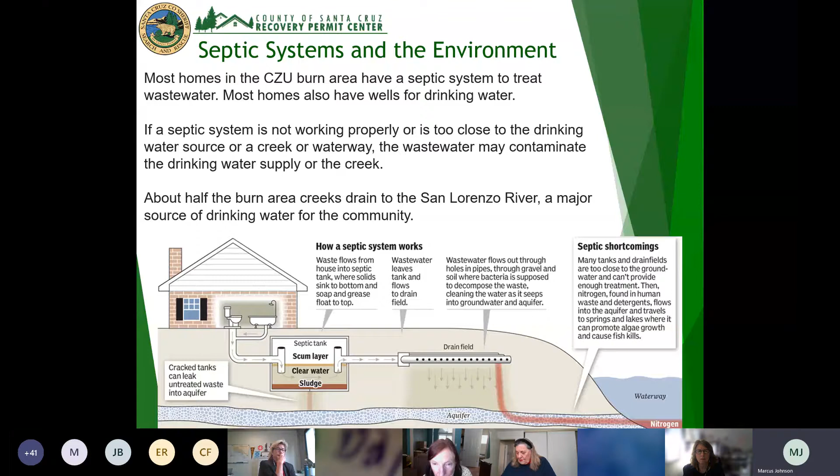So Paya talked a little bit at the beginning about where we're going to get into some of the code sections. I know this is a drier subject than most people want to hear, so I've summarized the main section and the main areas of the sewage disposal part of the code.

Really, what we're all living in is the same section regarding in-kind versus adding waste or load to a system, and what you've heard versus what you haven't heard. So basically in the septic world, you have a 500 square foot one-time addition of habitable space that doesn't include a bedroom increase. I know you've heard 10% and a bunch of other numbers all over the board, but as far as the septic world goes, it's 500 square feet of habitable square footage that we're looking at.

And this section, 7.38.080, existing systems—what we're trying to do is review the existing system as it was functional prior to the fire and line it up to what the proposed rebuilds are. So a lot of what we're looking for is to make sure that the system was functional, that it was in an adequate area, and that there was a legal structure. It was a legal, permitted system.

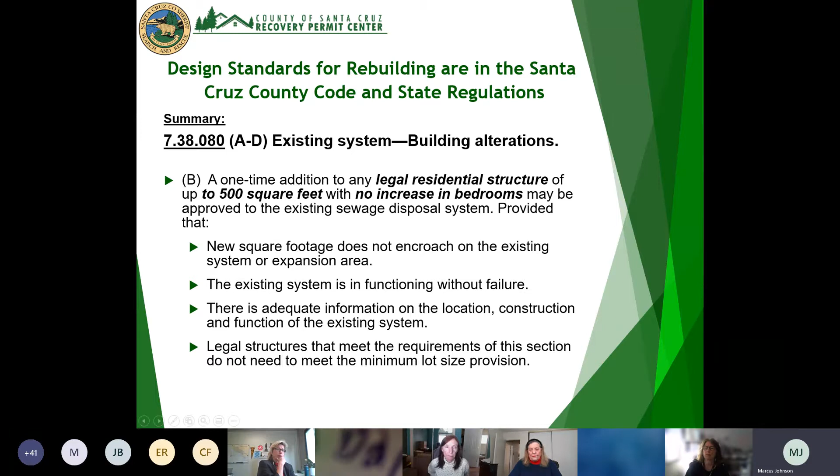So as part of that section, section C talks about occupied structures after a calamity. We're looking at the legality of the system, making sure it's sized properly. One caveat is we do have some smaller lots, and if you're an owner that happens to own some of those lots...

We'll try to get them bundled together to create as big a lot as possible. It's a pretty streamlined system with the assessor, just some paperwork so we can combine those lots to help the situation. In the long term it would help with expansion areas and repairs if it ever came to that.

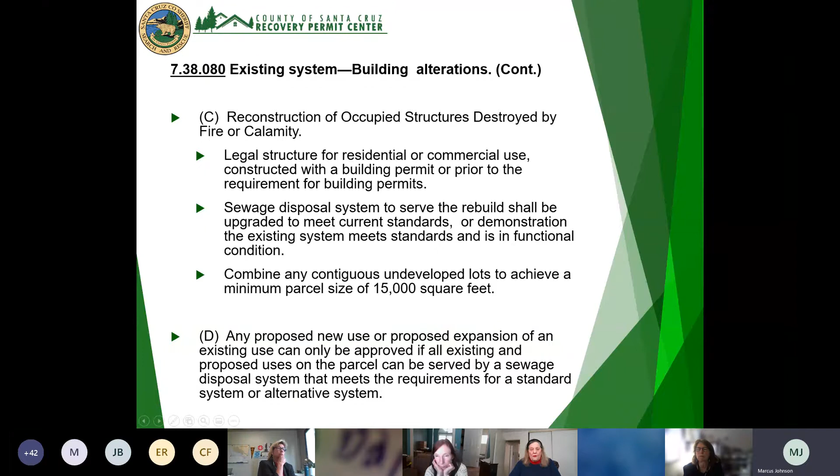So let me go to the next slide. We're going to get right into conventional systems, which most people currently have, and the inner workings of how they work, the components.

I made my pointer a little bigger so everybody can see what we're talking about. So the biggest thing: we have the house, we have your septic tank. The tank holds the solids, separates the effluents and the liquids.

Then it comes out into, in most cases, a distribution box. In some older systems there's a valve to distribute the liquid effluents through the leach lines. The leach lines act as a filter, filtering as much as possible. Some are chamber, some rock filled, but they basically filter the effluents through their chambers, through a rock system, and then through the soils.

Basically we're using the earth as a filter to clean that water before it gets back into our groundwaters and aquifers, and basically we're recharging the groundwater at that point.

The big thing here is the groundwater well. That's really what we're protecting, making sure we're not drinking contaminated water, either from a neighbor, upstream or downstream. So that's really what a conventional system is doing, and they're usually gravity fed, everything rolling downhill, clearing the waters over time.

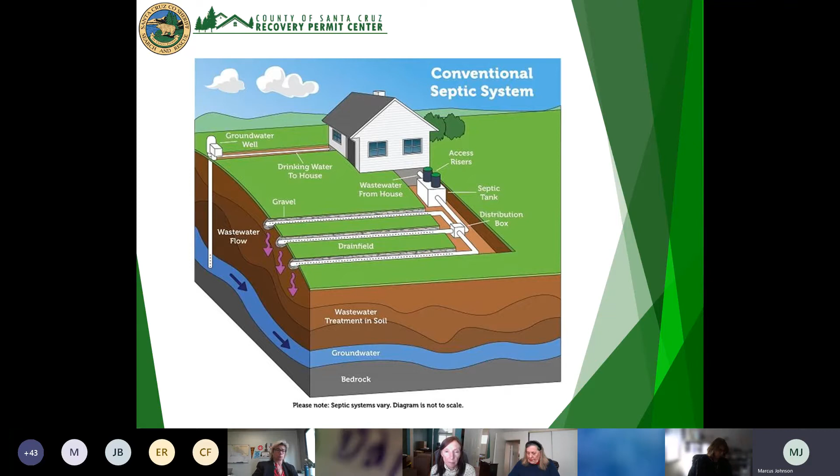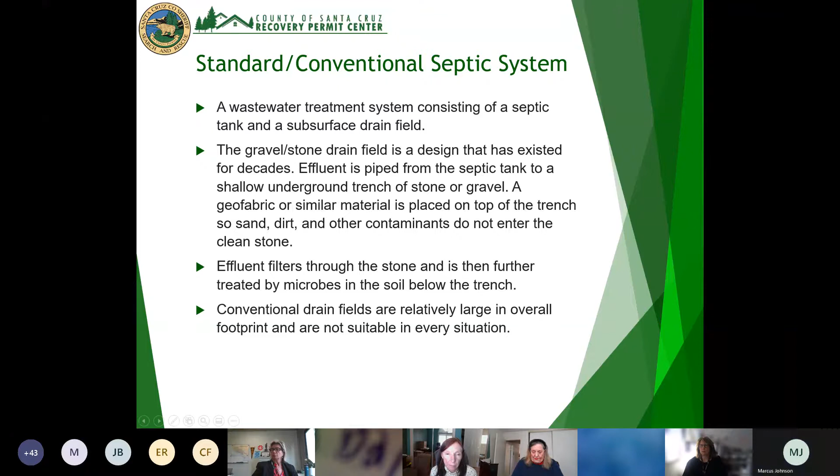So the standard system, to go over the picture again: it's basically to treat the wastewater, take the solids and effluents, separate them, and that goes through and filters through the leach lines, and ultimately gets all the way back through the earth and into your drinking waters and waterways.

So the first component coming out of the house is your septic tank. It's a buried tank. They come in concrete, polyethylene, fiberglass - I always trip up on that word. There's a list of standard tanks approved through the county, and I have that a little further along in the presentation.

Basically what the tanks do: you have the inlet of the waste and water that comes in, and two chamber systems. You have the sludge, which breaks down at the bottom, and then greases and stuff that float to the top, a lot of kitchen waste, stay at the top, and the effluent water comes back, gravity fed. So one tank fills up, pushes the water through, and then out.

Some tanks have effluent filters. They help clear out and clean out, and those over time get changed and cleared out. So what they're ultimately pumping out is when these sludge levels and scum levels get high - that's really what they're pumping out of the tanks during that annual maintenance. The risers, so you'll see the risers.

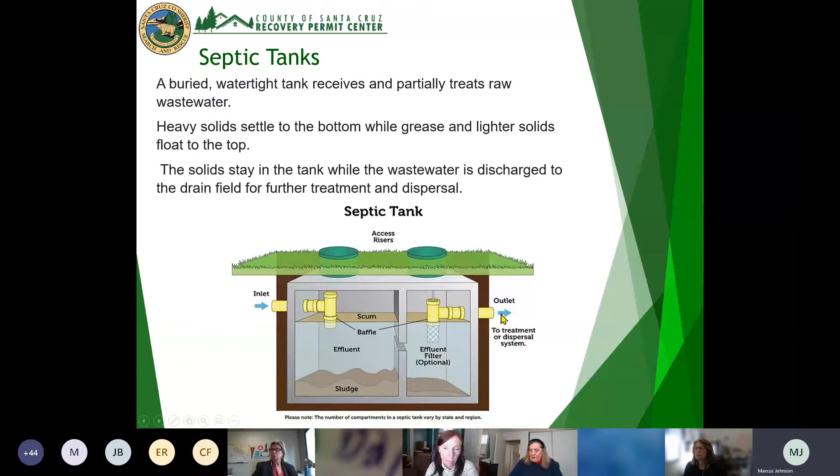Some are plastic, some are concrete, and you'll have rated versus unrated. So if your tank was under a driveway, you'd have rated concrete lids versus plastic lids. They basically give you access from the top of the tank to these two inspection chambers, so you could pop that open and see what's going on inside. Ultimately, it's separating the sludge from the scum. The effluent goes out, pushes through the chambers, pushes back out, and from the outlet side, it's distributing to the leach lines.

The tank's size helps with the bedroom count, though it's not the only factor in sizing a system. A 1,500 gallon tank is good for 1 to 4 bedrooms. If you had a bigger house, there's an additional 250 gallon capacity for the tank. So as the bedroom count goes up, the tank will get larger.

We talked about the 2 chambers. In Santa Cruz County, there's a 2-chamber system requirement, and also a requirement for the distance of the manhole. So when we get to the list of approved tanks for the county, all of them have been vetted to meet these requirements.

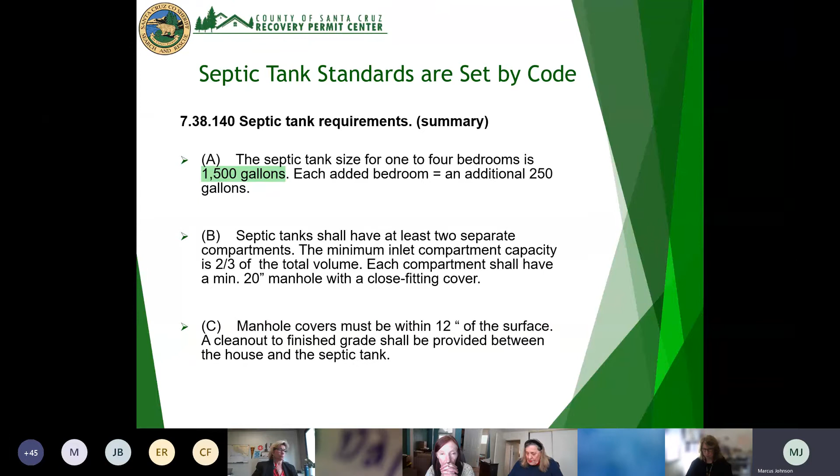Here's the list, and there's actually a link to the list. All the local vendors pretty much carry all these tanks, but you have the three types, their sizes, and what they're approved for. Most of them we see are concrete, and fiberglass is probably the most common ones we're seeing.

Just know the fiberglass and polyethylene tanks, we've seen probably the most damage with those. So we're starting to see tank repairs just for those particular tanks—either the tops melted or the risers melted into the body, and there is an ability to just replace that portion of the tank.

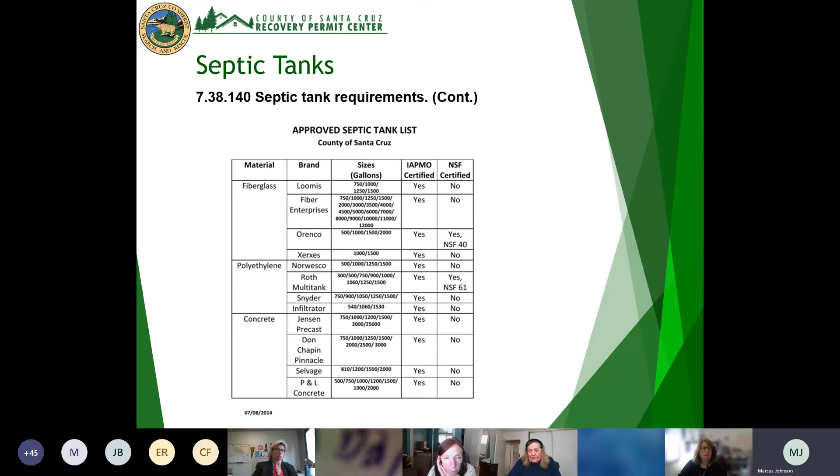So we get into the leach lines. The leach lines actually are really the determining factor of the size of your septic system. We talked about most people having a 1,500 gallon tank, obviously sized for 4 bedrooms capacity gallon-wise. But the real star of the show is the leach lines—they're taking that effluent from the tank and processing it through the earth, clearing that water. So the size of your leaching field matters.

There's the separation between the groundwater aquifers and the top and bottom of the leach trenches. So you'll hear from time to time we'll do rainy season tests, because that's a better determination of how high the water tables get in relation to the bottom of the leach lines.

Percolation rates are basically the ability of the soils to receive that discharge water and the speed of it. Usually you want to live in the middle, a medium perk type—too fast or too slow really isn't that great. And also the type of soils matters—sandy soils, clay soils, they all have different capacities when we're talking about percolation.

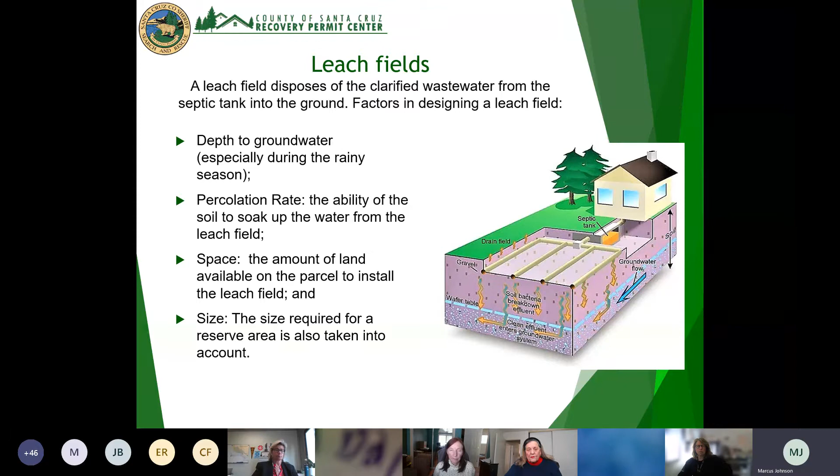So getting into the determination factors we went over. The soils, the water levels, there's also setbacks that go into it for wells, springs, waterways. That has to do with it, and some have changed over time. We've had new wells put in that may be too close or that popped up. And then there's the level of water, like we talked about the rainy season and winter season where we just have higher water levels.

We went over the expansion areas. The big thing about the expansion area is you're relegating that space as unbuildable as far as it's being set aside for septic purposes. You can always build in those areas, but we would just have to at some point reestablish a new expansion area. So when you're laying out the properties and looking at any future development, think about where that expansion area is in relation to it.

That's a big one when you're realigning and resetting up your site plans, is to where this all lines up, because not having the expansion area is one of the big tickets to not meeting a standard system, putting you in another realm that we'll get into a little later in the presentation.

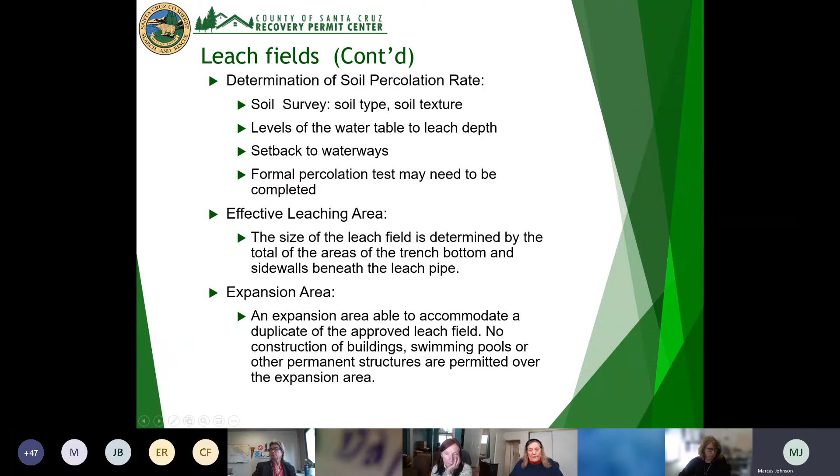So here is the percolation rates and square footage, and the square footage is the square footage of leach, not necessarily square footage of the house. It's the actual square footage of the leach lines - the length, width, and depth. So you can see, like I said earlier in the presentation, you'll see I have a 1,500 gallon tank, but maybe I only have 600 square foot of leach. That's telling us that system is set up for a 1-bedroom house.

We also have seen, and like Pius talked about earlier, that every lot is very site specific. And even within the site specific, the construction of the septic system is very specific. You'll see some systems that are permitted for a 2-bedroom but actually were built for a larger system. The records will indicate they were built for a 2-bedroom, but they have the 1,500 gallon tank and they put in 1,050 square foot of leach. So it's very specific to the records and the history of what was established when developing the properties.

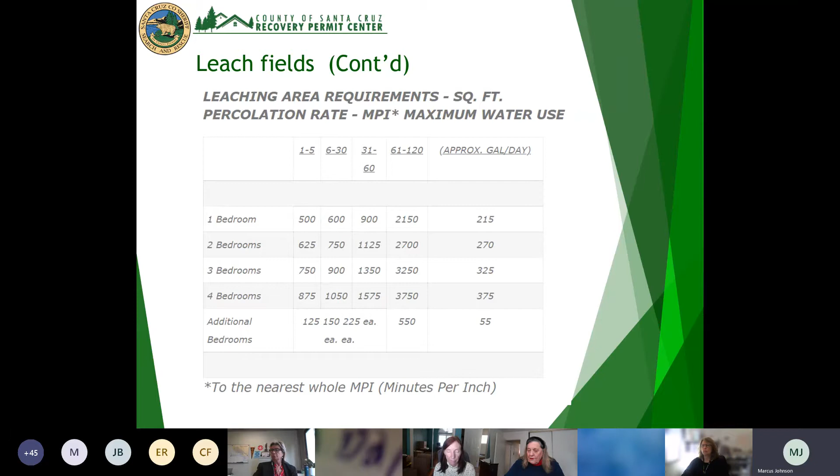So then we get into the standard type of system. The conventional systems, usually gravity fed, good percolation rates. We have space, and the water table isn't too high.

Then we get into the non-standard and advanced treatment type of systems. Basically, a non-standard system is anything that doesn't meet all the criteria of a standard system. They also use other technologies, either advanced alternative technologies, filtration systems, monitoring panels, things of that nature that just don't meet the necessary standard. They're basically adding or reclarifying the water prior to it.

Some examples of non-standard systems are alternative systems. They basically utilize additional technologies, and these help with the flow for adding bedrooms and adding size to your specific system. Then we have limited expansion, as we talked about - not having 100% expansion on your systems.

They basically are using pre-clarification systems, removing or raising the level of the leach, like a mound system or filtration system, so that they're reducing the actual amount of leach lines that you would need. By pre-treating the system, the waters that come out of the tank reduce the ultimate level, length, depth, and width of leach lines needed. So whatever's coming out on the back end is a lot cleaner, and going through the soils, it's clarified at a faster rate because it's already a lot cleaner.

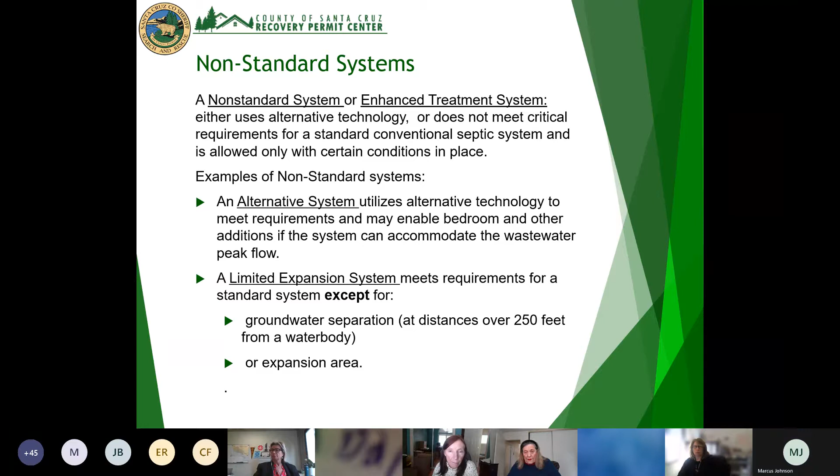Continuing on limited expansion, we'll see that on existing systems where they'll be adding to it - maybe it was a standard system, and for whatever reason we can't meet setbacks. So that's what we'll usually see done to a system to create an addition or an additional bedroom in those particular areas. Now, when we start talking about limited expansion, there are other parts to it.

These systems don't need what they call annual maintenance inspection fees like some of the other ones we're going to get into with advanced treatment. So we'll probably see a lot of this on the upgrade side, on a lot of the systems, as far as making the best out of what we have and the technologies we can use.

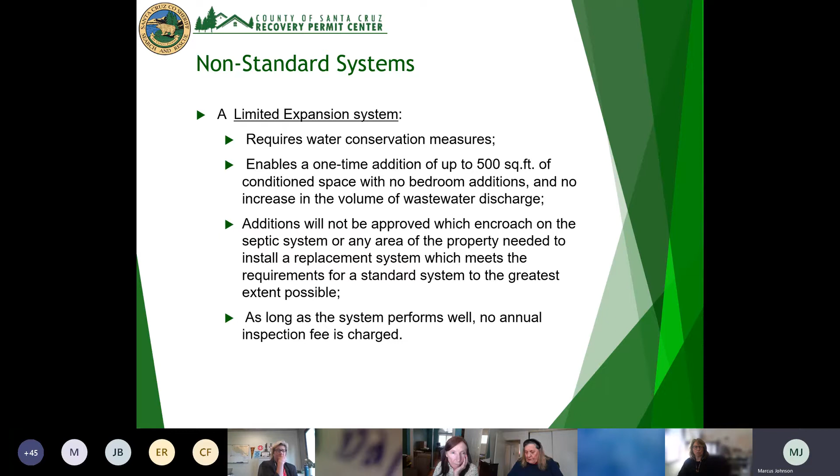Then we have low flow systems. Same thing, these have the same components added to it. The difference is now we're using a low flow system where we're conserving water as a means of not pumping as much into the system, so you still have the ability to do additions. This one comes with annual fees and maintenance that get put onto the tax bill to make sure we're meeting the water conservation measures and it's still working properly. The way this system works is we're cutting down the effluent water we're putting into the system with low flow toilets, limiting faucet and water consumption.

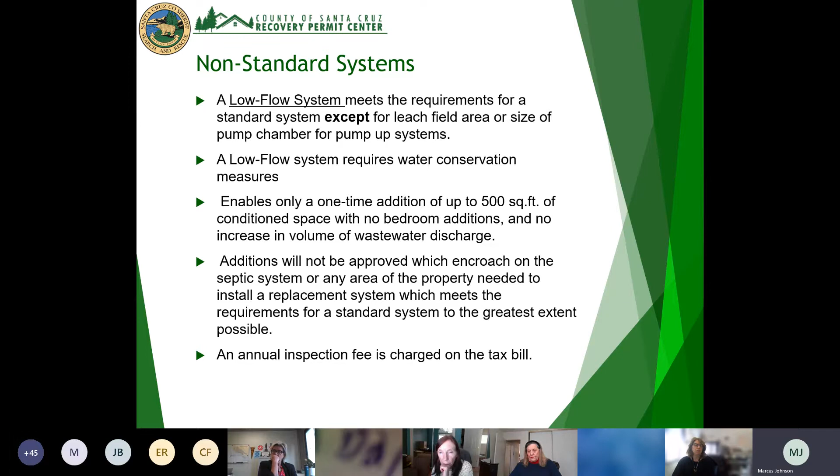So then we get into the advanced treatment systems. Especially in the burn area, we're in watershed areas, we have sandy soils, areas of slow perk and fast perk, and then the terrain itself - very steep slopes, small lots, and restrictions on waterways and banks. It's a tricky area septic-wise, there's a lot of factors that go into it. An advanced treatment system adds extra components and treats the effluents more efficiently, so the leach line areas go way down. The installation is a little more expensive - there's a consultant that has to design it, additional testing and inspections, annual maintenance, and an annual operating permit that goes along with these types of systems.

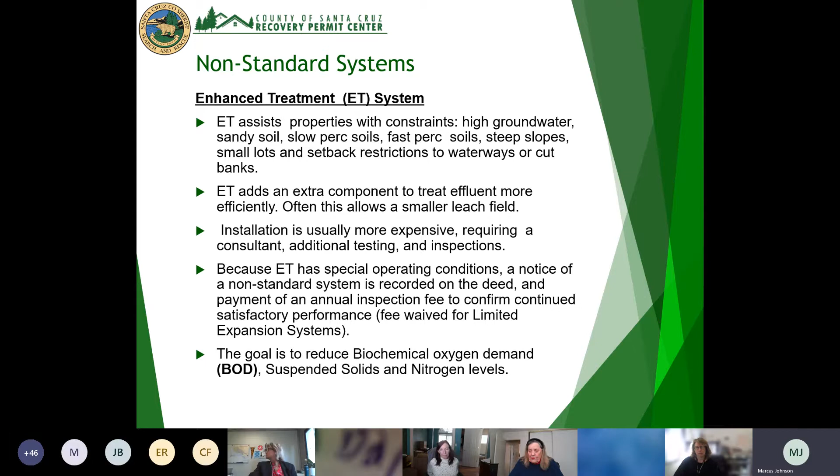So the goal of the advanced treatment systems is to take the biochemical oxygen demand, the BOD - I know it's a lot - suspended solids and the nitrogen levels. Basically what we're doing is super processing the water before it goes out. That's why these systems have a lot more components to achieve that. So on the back end, the water is a lot cleaner. When it gets through the soil it's clarifying - it doesn't need that ultimate separation that you would need for a conventional system.

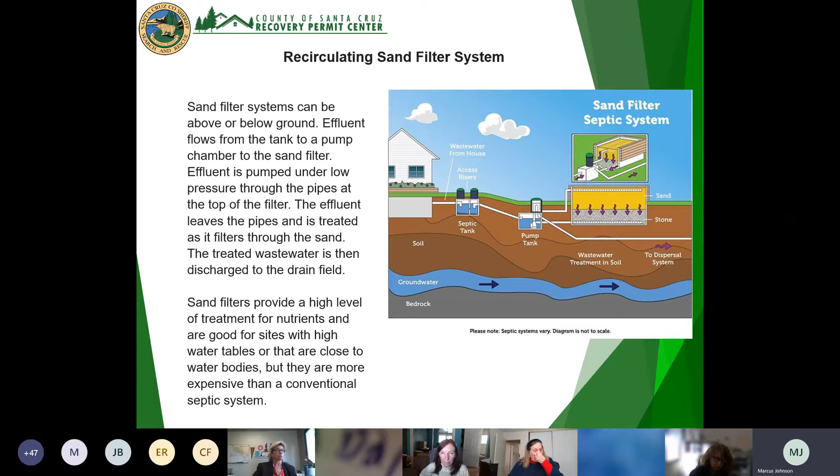So sand filter systems, we see quite a bit in this particular area. Basically what it does is it recirculates - it pumps the effluent up through a concrete sandbox, taking that concept of using soils to clarify in a conventional system and limiting it into this kind of sandbox. It filters through there and then recirculates back out and into the disposal fields. So it's basically looping itself and clearing itself before it comes back out and goes to the ultimate disposal system.

And then we have a mound system - this is one we see a little more in the area. With a mound system, we have a pump tank and we're creating an additional layer to get separation between the groundwater and more treatment area. It discharges through the trenches and filters. We're creating a sand layer, a rock layer, and basically lifting where the normal discharge point would be, creating more space to clarify the effluent going through the soil. We're creating better conditions higher up with the sand, rock, soil and gravel that would be required, giving it more time and help as it clarifies through the soil. We're lifting up those leach lines above ground, creating a mound system to clarify through a created area before it gets to the filter. So the biggest thing about all these systems is we're finding ways to clarify the water before it goes back into the natural soil.

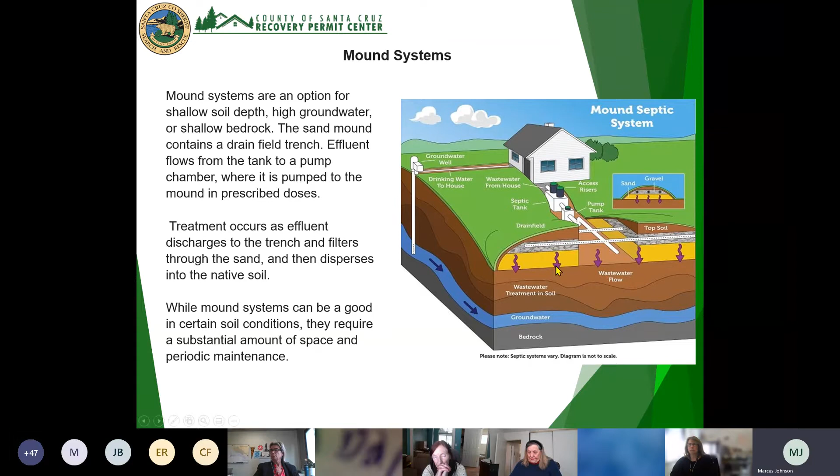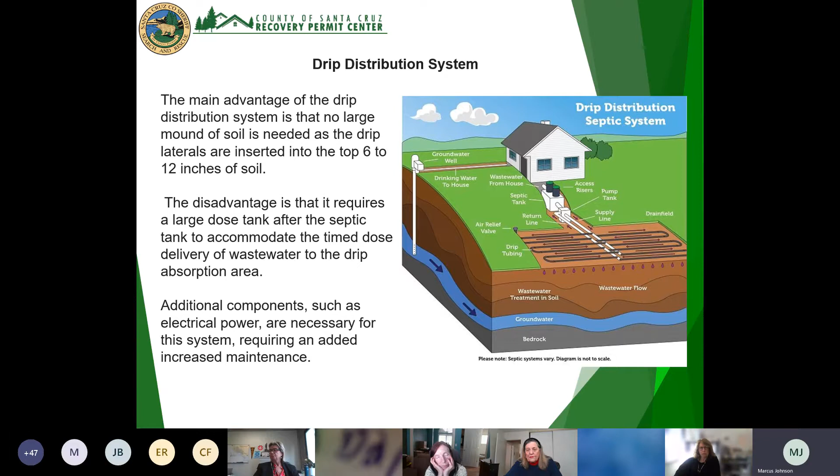So drip systems - basically about the same concept, we're limiting the system. It's a pump tank, we're clarifying it, and then limiting the speed of the effluent going back into the system. We're slowing it down and dripping it through at a slower speed. We're still clarifying it, still cleaning it. The fields get a little bigger, but we're staying a lot higher - imagine at a sprinkler level, not as deep in the soils as you'd be with a normal leach line. We're slowly dripping the effluent back into the soils, controlling what's going in and how fast it's going in to allow the absorption to happen.

Big subject is ADUs and septic. So I understand most people want to take advantage, maximize their properties, and add an ADU.

So we'll see in a lot of the pre-clearances that there is an ADU, a JADU, a new house, and the thought is to downsize the house from a 3 to 2 bedroom and add that 1 bedroom into an ADU, which in theory sounds like it'll work, but there is a requirement for the ADU to have its own sewage disposal system.

So the ADU has to have a minimum 1,500 gallon tank. It's the county standard for minimum. And then the ADU leaching is calculated not just by bedroom, but there's also the loads of the kitchen, laundry room, and just the generic space, just like a normal house would be. So we're not just taking that leach field bedroom size. There's also normal living loads that have to be accounted for on your ADU.

So with properties that are larger than 2 acres, you have the ability to add a completely separate system to that ADU, so you have 2 separately functioning systems, one size appropriate for the house, one size appropriate for the ADU. Properties that are less than 2 acres, you have to add that other tank, and then the leaching requirement of determining the ultimate leaching area for both the house and the ADU.

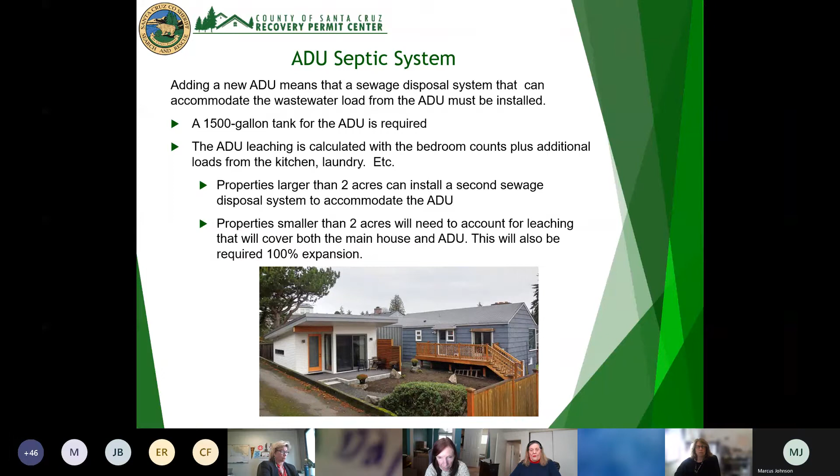Like I said, I'm seeing a lot of them on the pre-clearances, and understand that people want to maximize, and if you're going to do it, now's the time.

So phasing the projects - when we start getting into the pre-clearances, submitting for the different pre-clearances, you can note that there's an ADU. Time-wise is going to be the biggest factor on that. Are you going to build it concurrently with the house? Are you going to build it before? Are you going to build it after? And kind of that time frame.

So building the ADU first, conceivably you could connect to the existing septic system. In most cases, the existing septic system is going to be large enough to accommodate an ADU. Pre-planning and setting up that phase construction to be successful is going to be important on this one.

So if you're connecting to your house, your existing house system to build your ADU first, space-wise, being able to locate wherever the new system's going to be - in a lot of cases, where the ADU is going to be versus where the house is and where the septic system is, it's going to get tricky to get that connection and get the flow into a conventional system.

So the layout of the site plan is going to be huge at this particular point. And then also determining if you want to size to do a new system - like we talked about on the slide before, is the size of your property. So 2 acres is a little easier, you have the ability to do 2 separate systems. When you're less than 2 acres, it's going to get a little trickier.

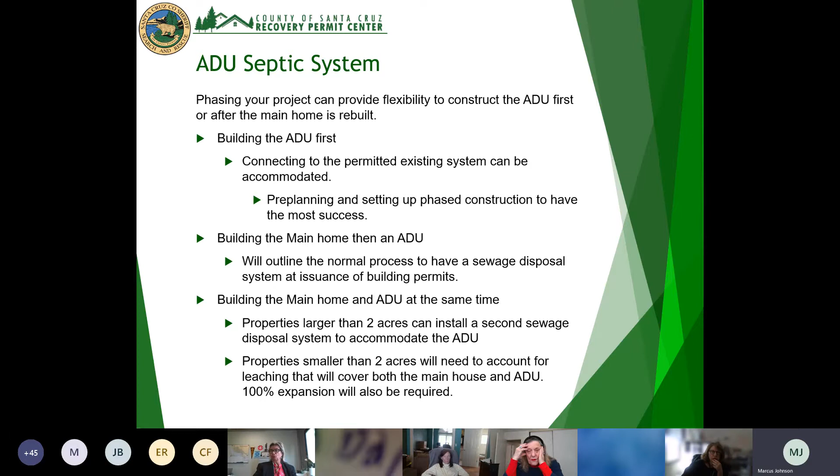So when you want to start getting into ADUs, it's just pre-planning, getting that information ahead of time, and when you're doing the pre-application meetings, figuring out what's the ultimate goal. It's easier to know the grand scheme of everything, and maybe we're not going to hold you to that time frame, but just knowing the list of events that's going to happen helps us understand what systems and where you're going to be with those particular types of systems in relation to an ADU.

So getting into the environmental pre-clearances: as part of all the rebuilds, there's a pre-clearance that has to happen, and it consists of environmental, geology, and fire.

As far as the environmental side, we are looking at whether the disposal system was properly sized for in-kind rebuild. If it's not properly sized, we look at what the new rebuild is going to consist of, and what will be needed to construct that sewage disposal system.

We also check permit history through environmental health documents, building permits, and assessors, and we pull the hard files just to get any and all information.

So when it comes to that and the plot plan associated with it, we're confirming setbacks from the disposal systems to the rebuilds, groundwater, creek, and wells. And I know Dr. Underwood has something in the works for the properties on 236 that will help in those cases too.

Did you want me to say something right now, Marcus? Oh yeah, okay. So one of the things we know is...

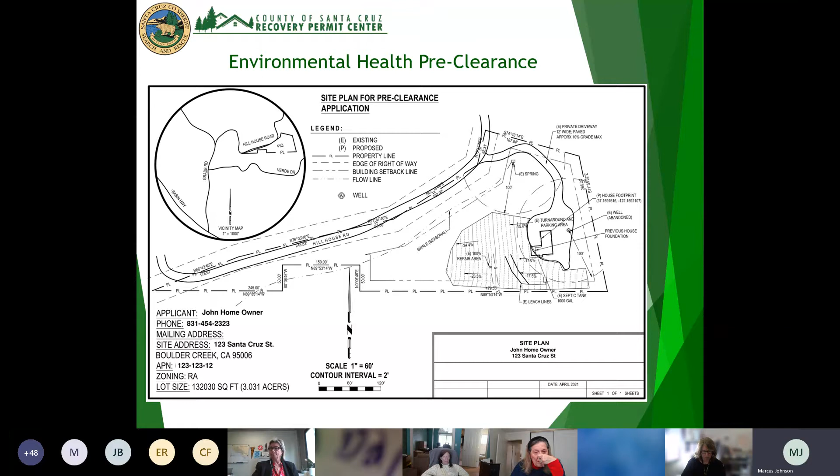So this is one done. I think you submit your information and these websites produce this information for you. So this is one type that we're kind of seeing a lot of. We're seeing a lot of hand-drawn ones that are on grid paper, scaled out. They work just as good.

Same information. We give them that information from contours, which is usually some of the harder information to get, but on the GIS there is a contour layer, and also the coordinates for where the house is going to sit. Our GIS also lets you pinpoint the location from the view and drop a pin where the house sat or where you're going to move it to.

And so, like I said, it's just the same information, all the same information. We're just seeing a lot of hand-drawn ones, but they work just as well — clear, concise information where the septic system is, and getting information to all of the historic records that's available too.

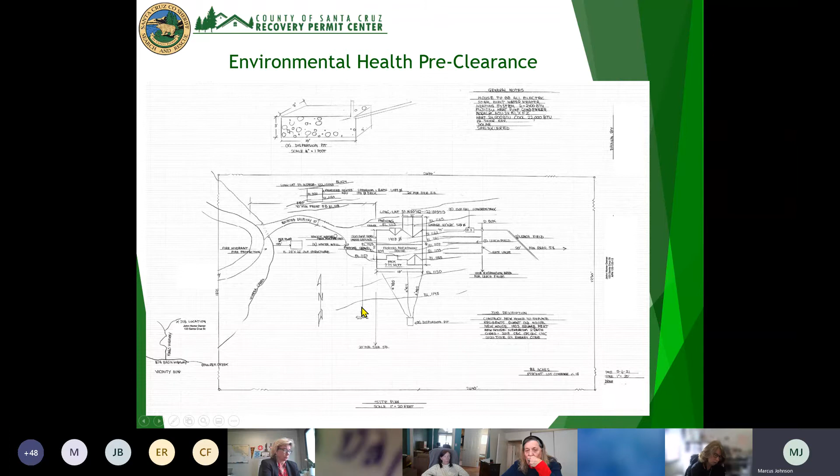And we'll kind of go through how to find that and where to see it, because there is a lot of old, especially through the environmental health records, old plot plans that show where everything is to kind of basically build off of. The third type that we're seeing a lot of is obviously ones that are done by designers, engineers, design professionals.

And like I said, as far as we're looking for it, it just has all the minimal information that we're looking for. They just, you know, come in all ways, shapes, and forms. And as long as it has the information and it's legible, we'll work with it.

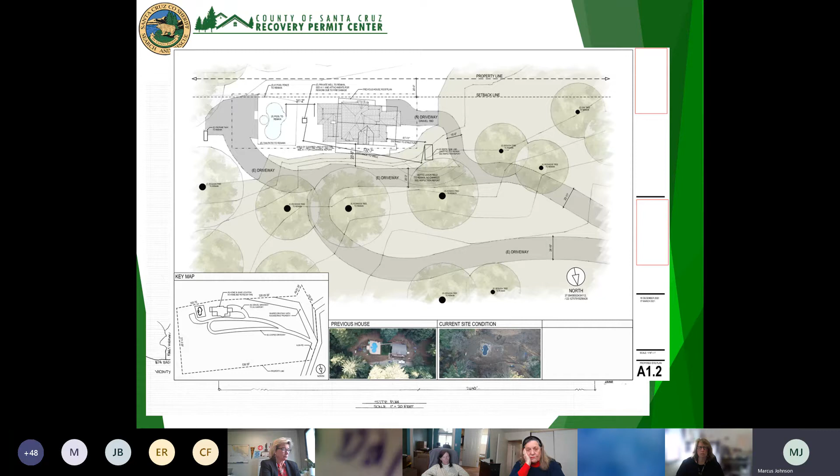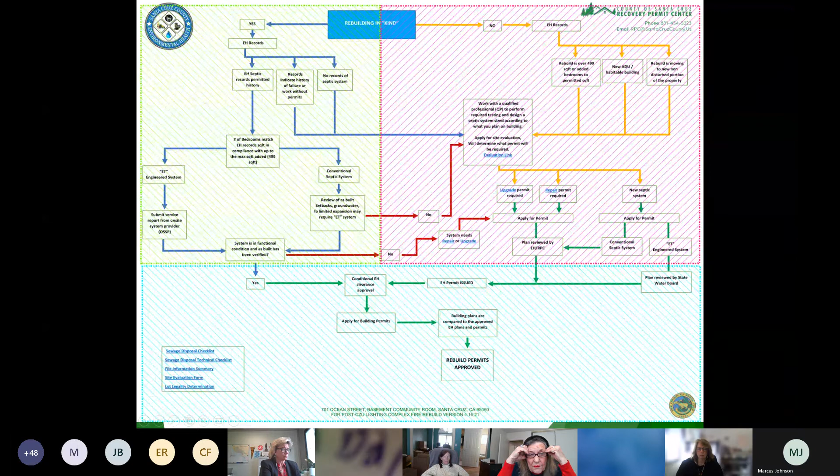So we're going to get over here in this green section that we're rebuilding in kind.

So we're taking your pre-clearance application, we have your plot plan, all your applications. First thing we do is start pulling the environmental health records to see who, what, where, how big, what we have as far as information wise.

So one thing we're looking at in those environmental health records is the permitted history, if we can find any, if the system on our plot plan and location matches, and the bedroom count matches. We talked about earlier that where we're living in these existing systems, we can add up to 500 square feet to these systems of habitable space without changing the bedroom count.

So that's one thing we're looking at through those particular documents. And then what type of system was it? What was its functioning ability? Was it a conventional system? Was it a non-standard? Was it an advanced treatment? If we're going the conventional route...

We're making sure conventional, everything still works, we meet our setbacks, we don't have any new information as far as groundwater, setbacks from waterways. If we have maybe expansion problems - let's say you're building a garage, a house, and an ADU, and we just don't have physically enough space for 100% expansion. Those are things we're looking at as we go through the pre-clearances.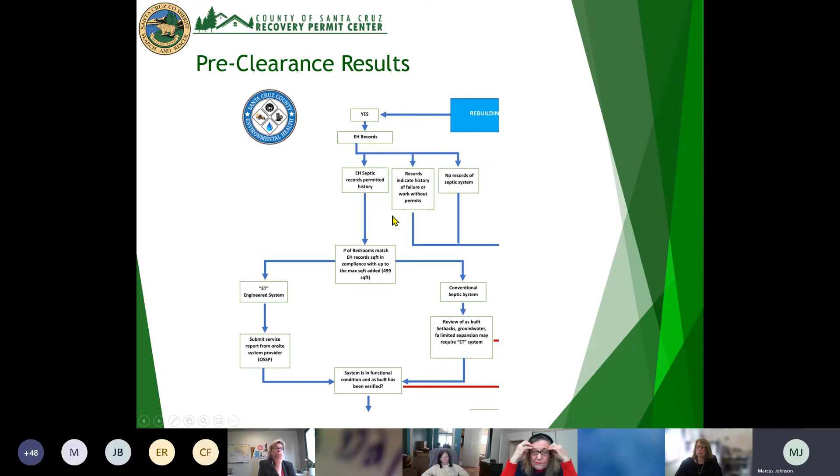So as part of the review, here's the link for the environmental health reviews. It's all public records - you go to the website scceh.com, and right at the top there's Santa Cruz County Environmental Health Records. From there, it'll pop up this list of what kind of records you're looking for. For me, I just hit all documents because it'll pull anything associated with that address or that APN.

And then you go ahead and plop in either your APN or your address, and it'll pull up a list of any documents, historic permits, plot plans - just whatever we have for the property over time.

Another part that we look at is the assessor's website, to see what the size of the property was as far as square footage, bedroom counts, and the year it was effected, and the legal what the actual property was. It's the best indicator of what was there prior to the fire.

Same thing, I have their link at the very end of the presentation. Plop in your parcel number, your APN, and it'll pull up your property specific info. Just know when you pull this up, it's going to be zeroed out because of the calamity reports for resetting the taxes. You'll just have to go - there's a little baby blue thing that says historic characteristics - and within that, it'll pop up the historic characteristics prior to the fire, so what they were assessing you on prior to that.

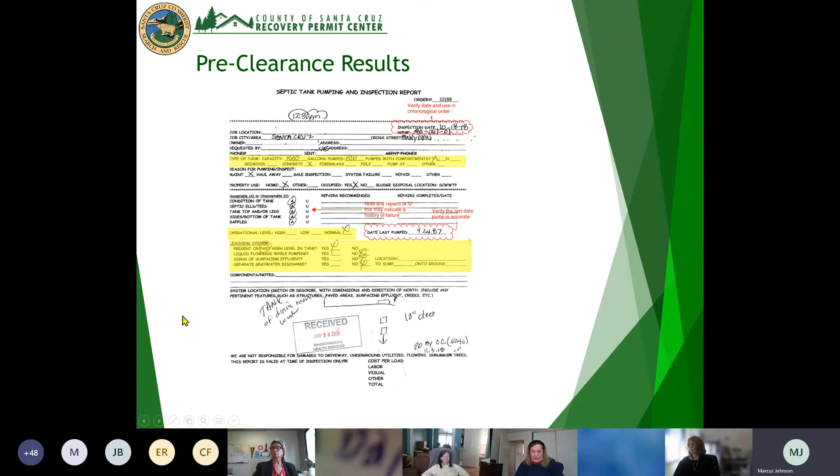We're rebuilding, we're just going to be bigger, adding ADUs or habitable buildings to the property, or it's being moved to another side of the property where maybe you can't utilize the existing system.

So basically, what those will ultimately produce is we're going to have to get into an area of a site plan evaluation, a site evaluation, which basically at that point we're going to have the design professional working with the county to determine the requirements, the load, the groundwater.

So basically it gets the design parameters of what the system currently is, what its capacity is, and then where, as far as the system types we talked about earlier - non-standard, advanced treatment, or hey, we have ample expansion area. The expansion area is very like for like. We'll go into our expansion area and then we'll create this new expansion area.

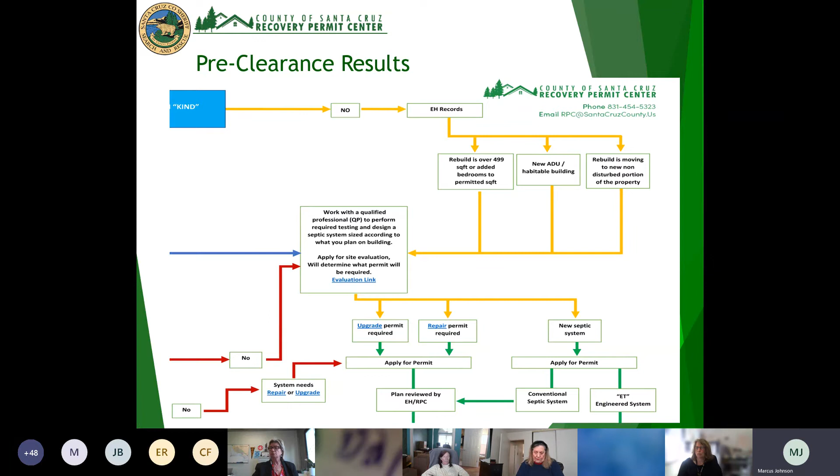And then we have advanced treatment systems, which would ultimately get reviewed by the state for all advanced treatment systems.

So get back down here. So the state water board reviews those advanced treatments. They're reviewing them to the exact same standards that we already have in place - there's no difference in standards. It's just as having a local board, a water board. It's part of the state's regulatory process to review those systems.

After everything's done on this side, coming down from the yellow side, your repairs, everything's good, permits issued, the clearances go - in most cases this is conditions of issuance for the building. So you can still concurrently, at this point, know what you need to do environmental health wise, but you can still move forward with your building.

Just know that going through your design, applying for your building permit, the turnaround time is about 7 to 10 business days for the actual building review. So at that point, by submitting, it would be in a hold pattern. Just kind of think about that.

You can still kind of work through your design and get everything moving forward, but you're going to want to know that submitting that building permit earlier, it's just going to kind of sit in an approved holding for the septic side of it. This other yes here is everything's functional from the blue side, conditional approval, and then apply for your building permits.

And then basically what happens is when you apply for your building permits, we verify that either what was submitted in pre-clearance - so plot plan, sizing of the house - matches what the actual application for the building is, and same thing on this other side here. We're comparing the submittal to what the environmental health permit was issued to.

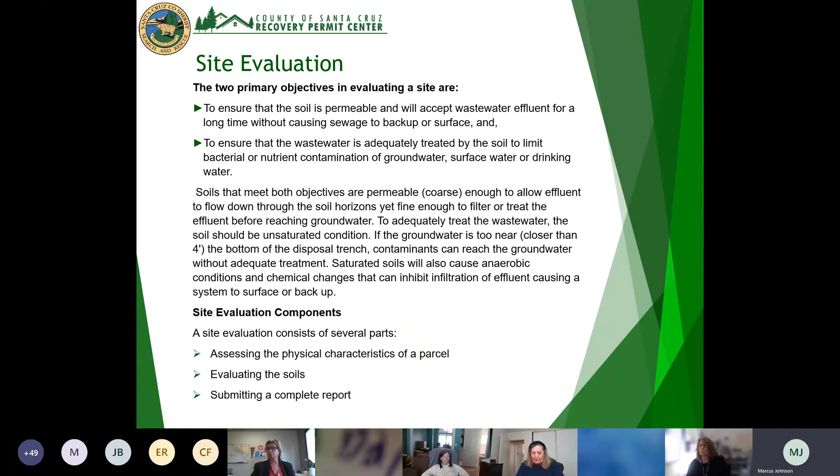In some cases, when we're moving the system to another part of the parcel, or an area that wasn't developed, we won't have that information. So in most cases, if we're moving or enlarging it substantially, we're going to do a percolation test with the consultant.

We talked a little before about the different types of permits - repair permits, there's a major and a minor repair. Major repairs are basically anything consisting of the leach field area, that's what puts us into a major repair. Minor repairs are anything small - changing distribution boxes, fixing tight lines, fixing the line between the tank and leach fields, some above-ground components for alternative systems, the non-standard and advanced treatment systems, or changing out monitoring panels, alarms, that kind of thing would be considered minor.

Then we have tank-only permits, so just replacing a tank. What we'll verify is a plot plan of where the tank is, and what type of tank you're replacing it with. Obviously we'll be at 1,500 gallons, but then we'll have to look and see if we're replacing it with an approved tank off the list. Below are some of the fees for these particular types of permits.

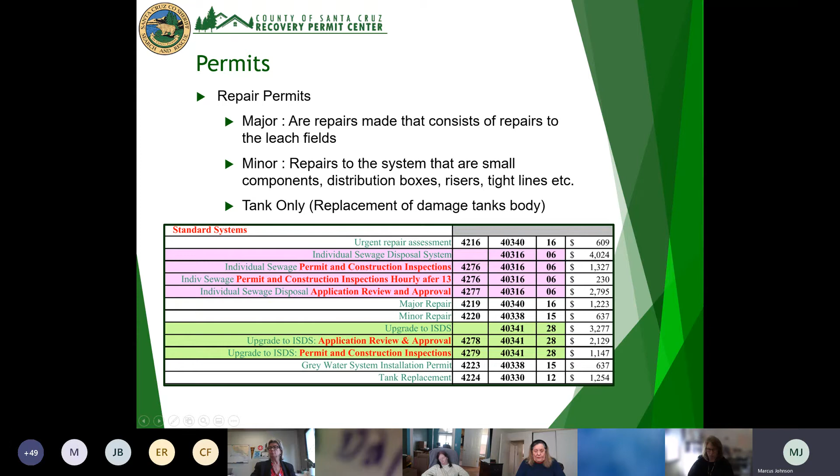And we'll get into upgrade permits - so we have upgrade permits and new system permits. For upgrades, everything's going through the RPC, we're working with the designer. They've given that information after a site evaluation and determine they're adding maybe a clarifier, adding filters, or changing the line to a chamber system versus a normal system. So they're taking that information from the site review - we're taking the existing system and adding components to make it a bigger or larger system, or helping it get to a point where it can handle that demand or load. Same thing with the new systems we talked about - there's the non-standard side of it.

They go through the RPC, and then the enhanced treatment part of it goes through the state ultimately for review. We will help put together some information with the state on what their submittals look like, their fees, and just help get them the most complete submittals, because that will ultimately help on their side to review without the back and forth. And then finally, I'll reach out to Dr. Underwood about the LAMP and the state, and where we're at with the regional board to close out.

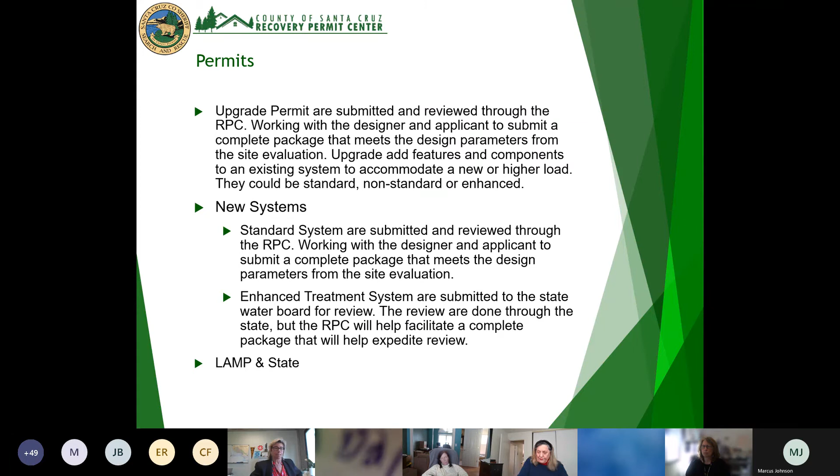Thank you. So, thank you. Thank you for clearing that up.

And last but not least, the links for what we talked about — environmental health records, assessor's GIS — will be a wealth of knowledge for the plot plans, the sewage disposal ordinance, if you ever want some light bedtime reading, and the website to the recovery center that has a lot of this information and a copy of this PowerPoint and presentation.

And then we'll get into any questions, comments, or anything you want to hear.

So thank you so much, Marcus. That covered both the technical and the general. That was really great.